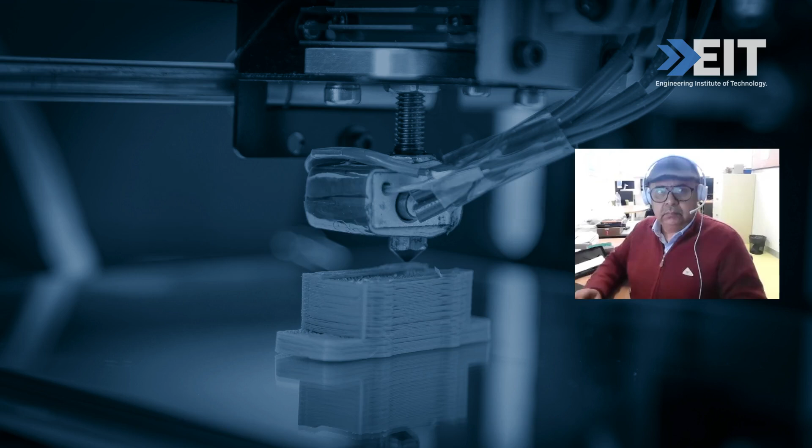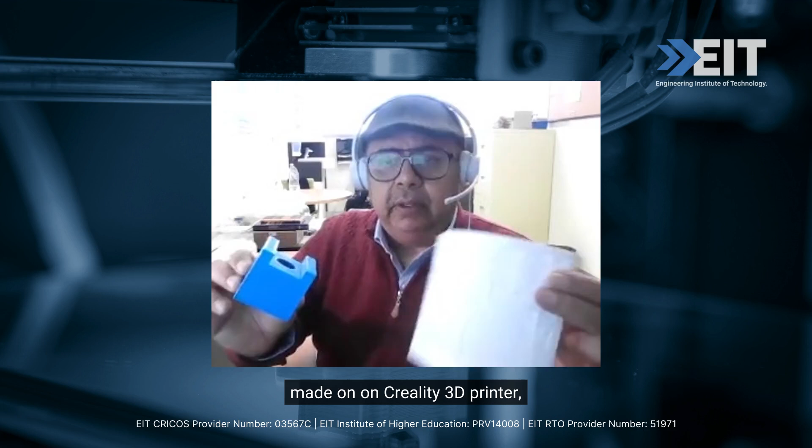Hello everyone. So today we'll see how to create a part on 3D printing. So we have a 3D printer available with us, Creality Make. We can create different products on that. These are some of the parts or products that we have made on the Creality 3D printer, which is available in our lab. Today in this video, I will demonstrate how to create a product.

Now this product which you see is a mobile stand, and in production it is manufactured by injection molding, but here we will be making it using our 3D printer. So how do we print this part? What I do, I start with the measurements.

After doing the measurements, we create a 3D model of this, and once the 3D model is ready, we prepare the model for the 3D printer. There are certain steps which I'll be explaining in the video, and then finally we print the part on the 3D printing machine. Once the part is ready, we remove the part, and then we do post processing. These are some of the steps that we'll be following in this video.

Now we have the CAD model available with us. We want to take this CAD model for 3D printing. There are a few intermediate steps. In fact, there are two steps. First, we have to create an STL file from this CAD model, and then we'll take that STL file to Slicer software for generating G codes.

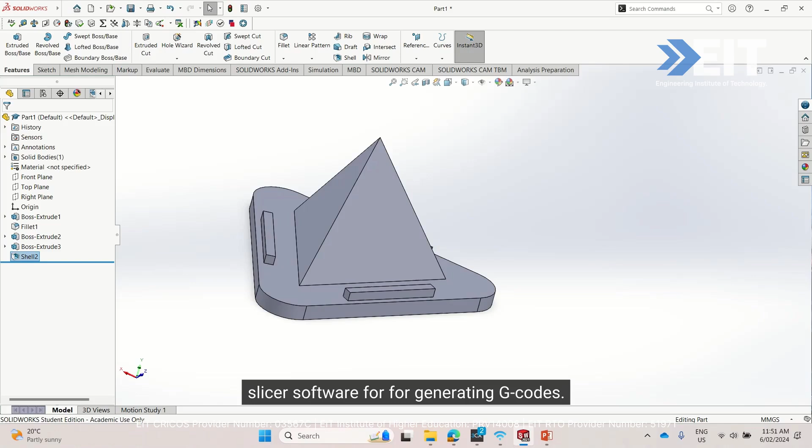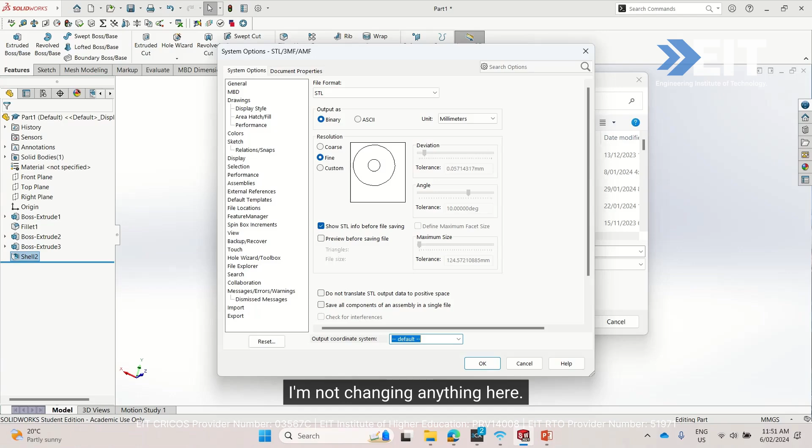For the first step, we have to go to File and Save As. In the save as options, we will be selecting STL, and when we go for the STL file format, there are some options. We can go to the options. For the time being, I'm not changing anything here. Simply say OK, and whatever option pops up, just accept that.

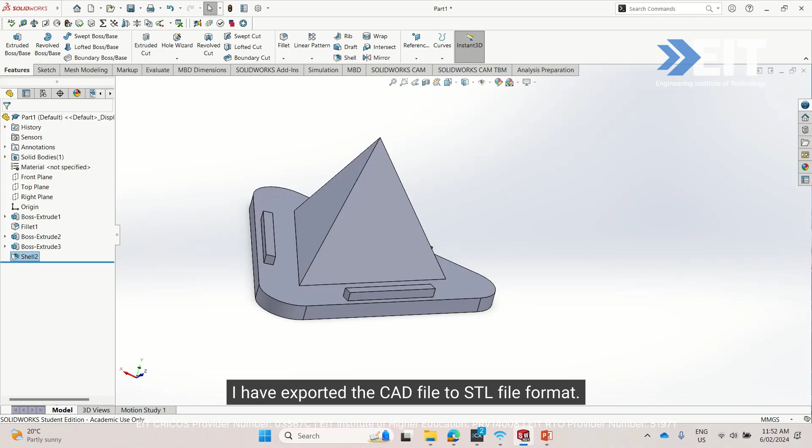Now I'm saving this file, part 1, on the desktop. Save. Accept whatever is being asked, yes, and OK. Now the STL file is created. I have exported the CAD file to STL file format.

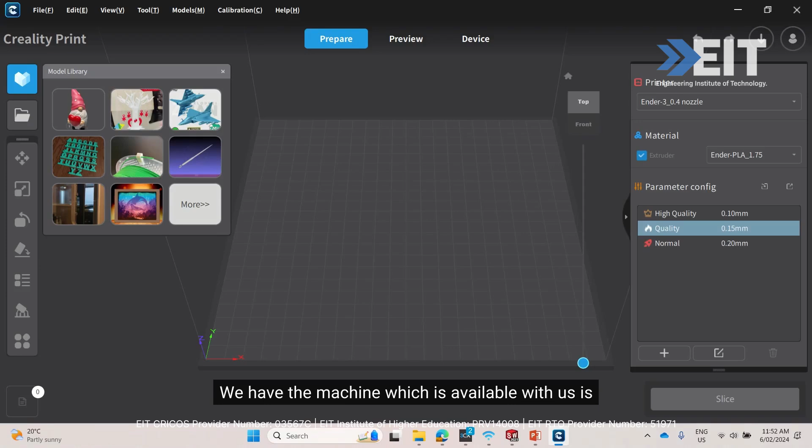Now I will open the STL file in the Slicer software, and the Slicer software that we have is Creality software, Creality Print. This comes with the FDM machine. The machine available with us is from Creality Make, and we are making use of Creality Print Slicer software. Now I will be opening the file which we want to print, part 1's STL file.

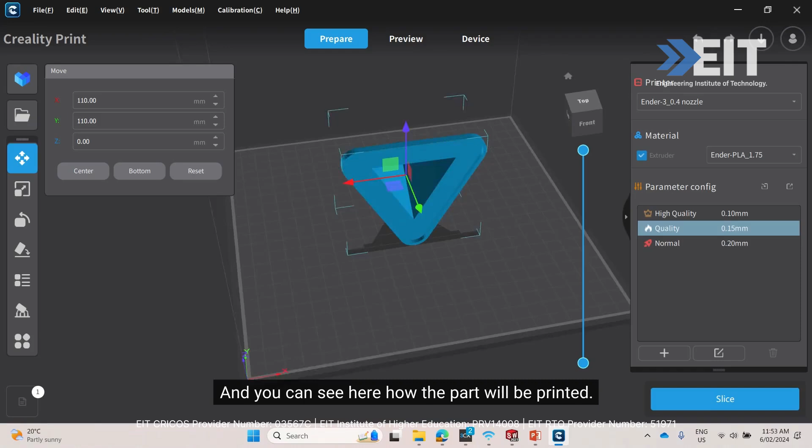Open, and you can see here how the part will be printed. The build area is shown, the bed is shown, and how the part is oriented on that bed is shown. This is not the right way of printing it. I want to rotate the part, and I want the maximum area of the part to be on the bed. In order to do that, I will be rotating the part, and for rotating the part I will use an option here on the left hand side, rotate.

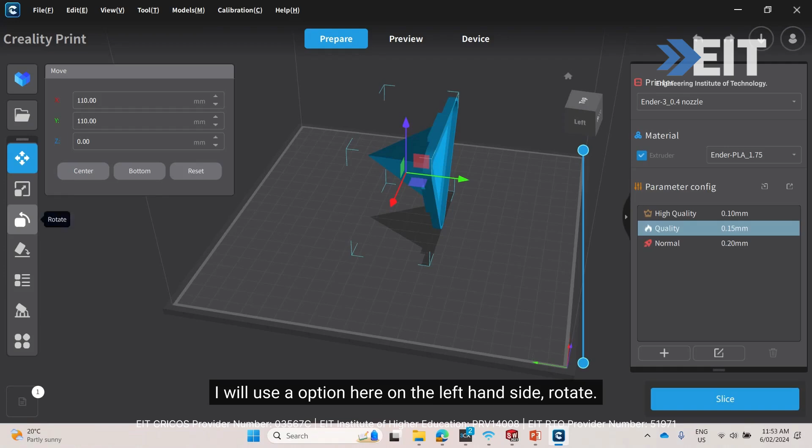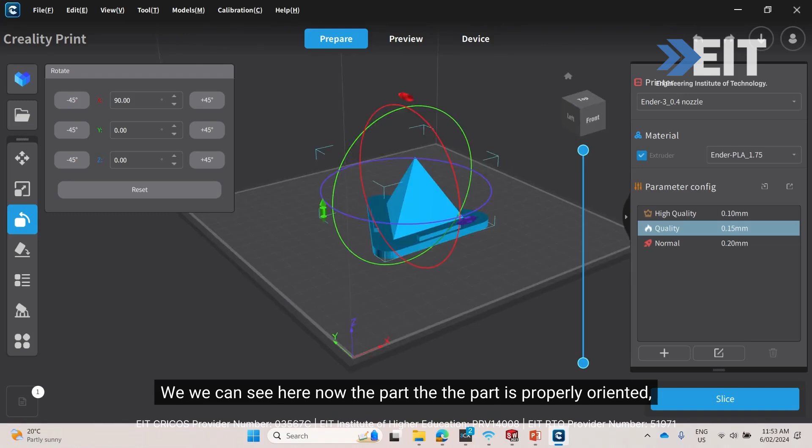Now I will rotate the part about the x-axis by 45 degrees initially, and then a second time by 45 degrees, so in total 90 degrees. We can see here now the part is properly oriented and it is ready to be printed.

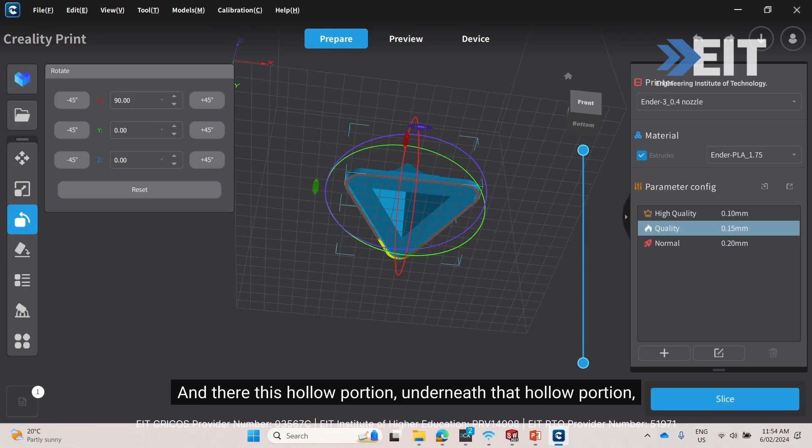But we have to do one more setting. If we see the part here, this is a hollow part, and underneath that hollow portion there should be some support material, then only it will be printed.

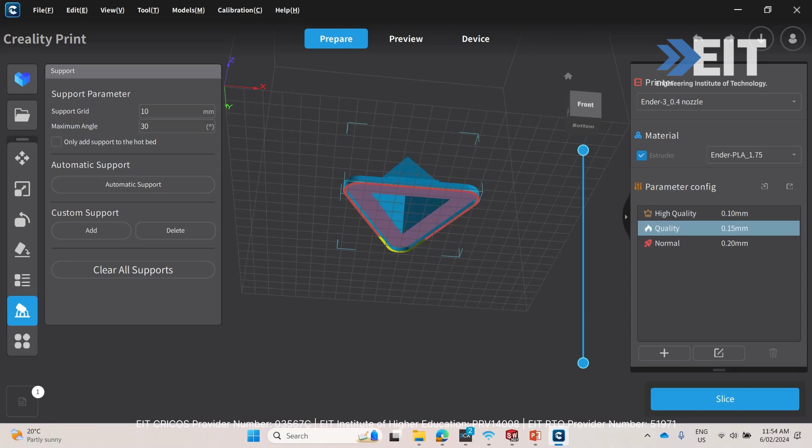So we have to provide some support material in this case, and in order to provide automatic support, go to this option, support, and select automatic support. The moment I do it, you will see what changes happen in the model. Wherever support is required, it will appear by using this option, automatic support. And now this is done.

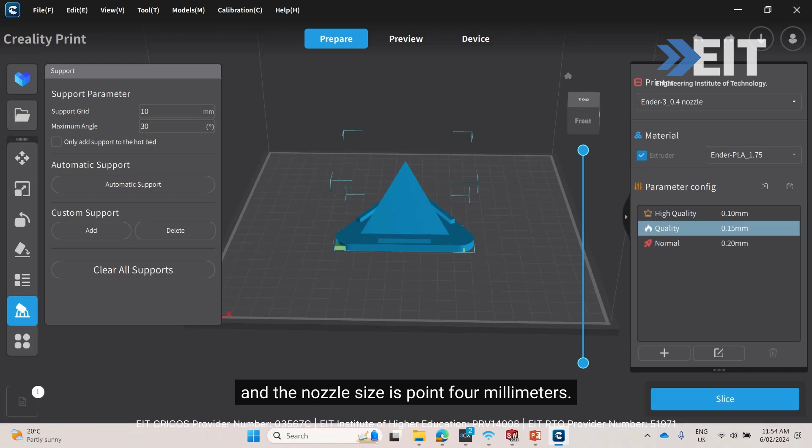Next step is I have to select the printer. The printer that we are using is Ender 3, and the nozzle size is 0.4 millimeters. Material that we are using is PLA, and for the parameter configurations, we can print it in 3 levels: high quality, normal quality, and medium quality.

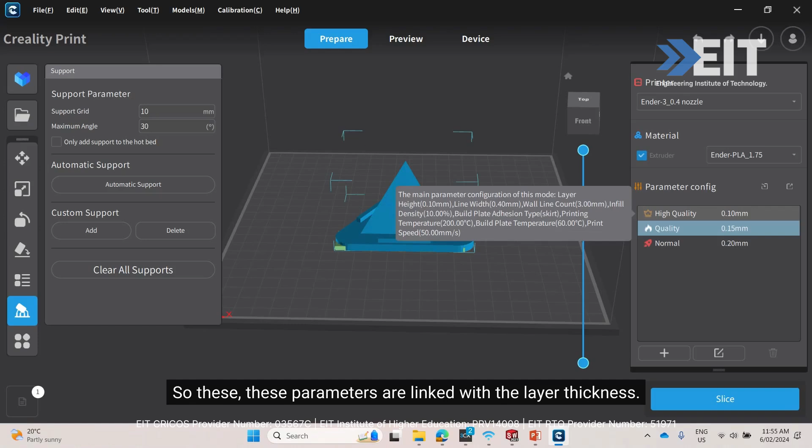So these parameters are linked with the layer thickness. So we go with the medium quality, that is 0.15 millimeter. Now we'll be performing the slicing operation. I'll click on slice, and we can see the slicing is over.

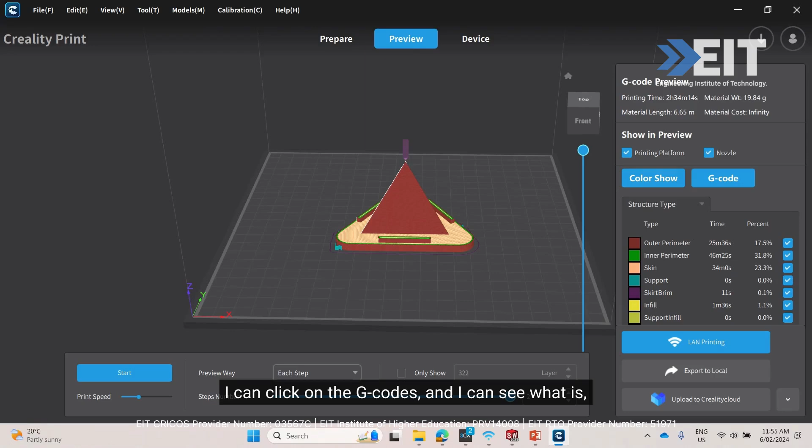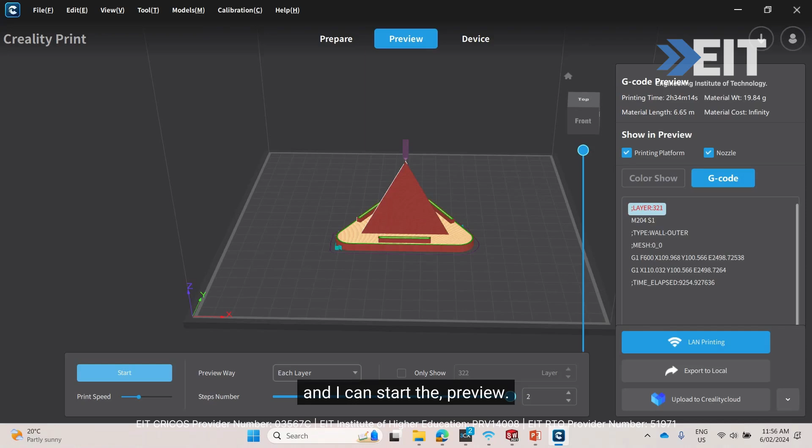I can click on the G codes and I can see what the G codes are here. I can also see a preview of how the part will be printed on the machine, and in order to do that I can check stepwise, or I can check layer wise. So in this case I'll be checking it layer wise, and I can start the preview. So you can see how the part will be printed.

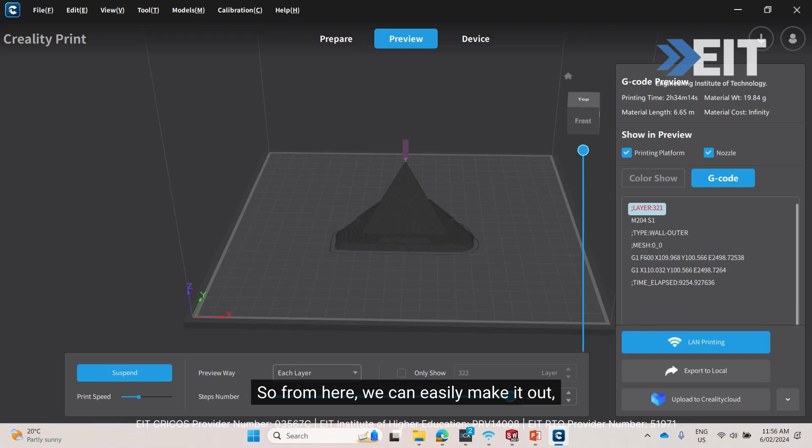All of it is indicated, and here on the right hand side you can see the G codes are running. So with each block of G code, what is happening on the machine is indicated here in this animation. So from here we can easily make out how the part will be printed, and if there is any issue with the printing, we can resolve it here before we take this file for 3D printing.

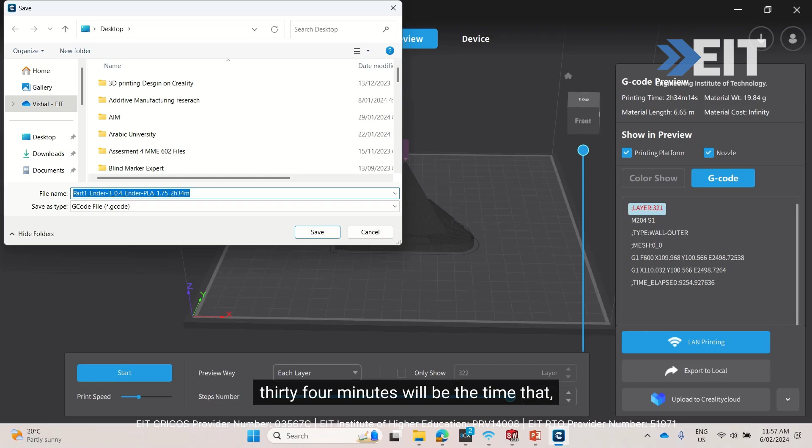Now everything appears to be perfectly fine, so we export the file to a local drive. We take the file from here, export it and save it on the desktop again, and the file format is G code format. So here you can see it is indicating 2 hours 34 minutes will be the time it will take for printing on the 3D printing machine. So save it.

The file is saved. The file which is saved, we can locate from here and we'll take it for printing on the machine. So this is the file. Now from here we copy this file on a pen drive and take it to the 3D printer for printing, and that's it. A few settings are required on the 3D printer, and those settings I will be explaining to you shortly.

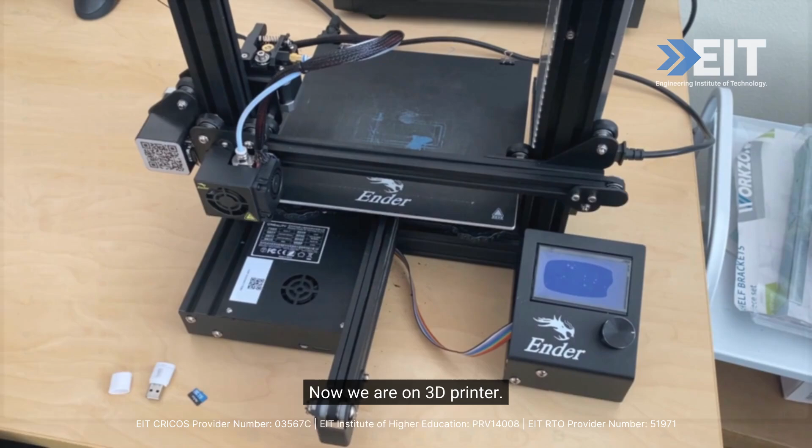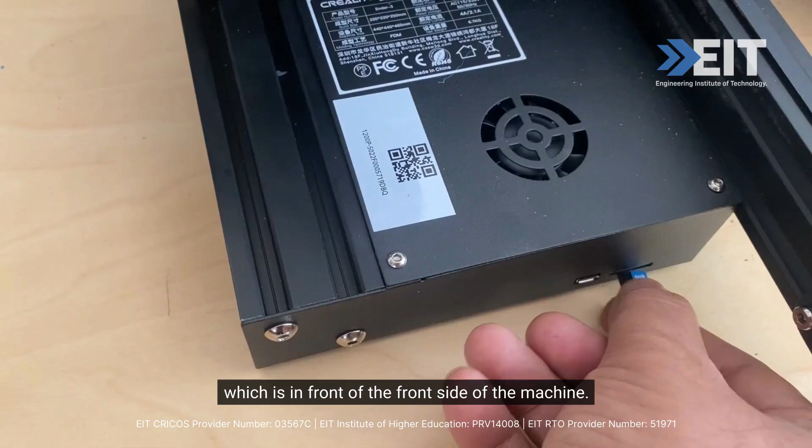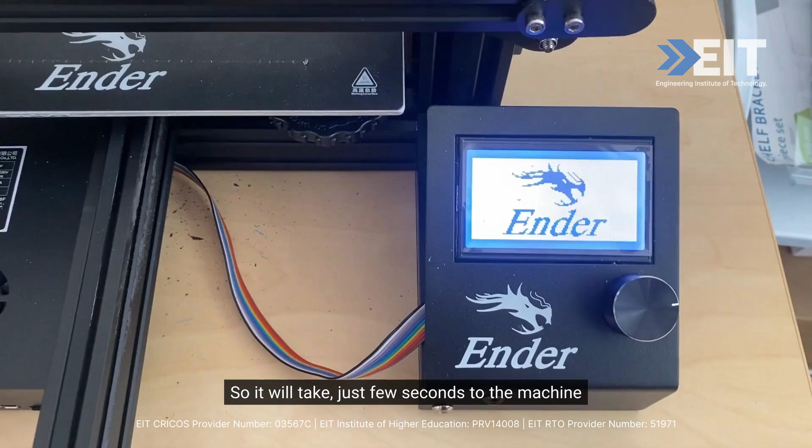Okay, now we are on the 3D printer. We have copied the program and brought it here on this SD card. We'll insert the SD card in the slot here, which is on the front side of the machine. The SD card is inserted, and now I will be switching on the machine. So the machine is switched on. It will take just a few seconds for the machine to be ready.

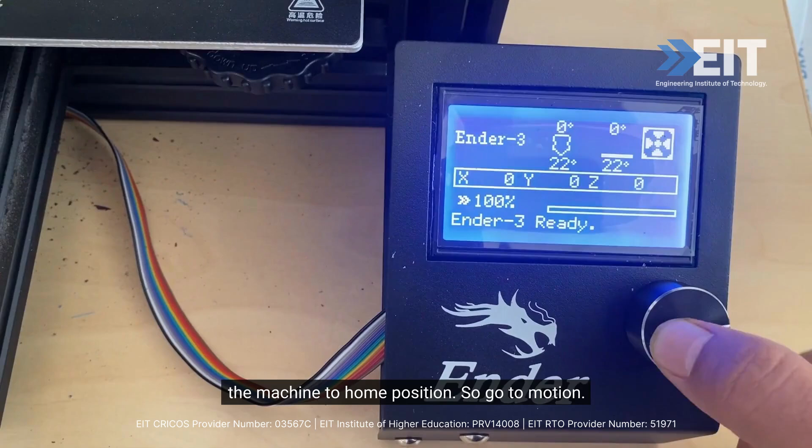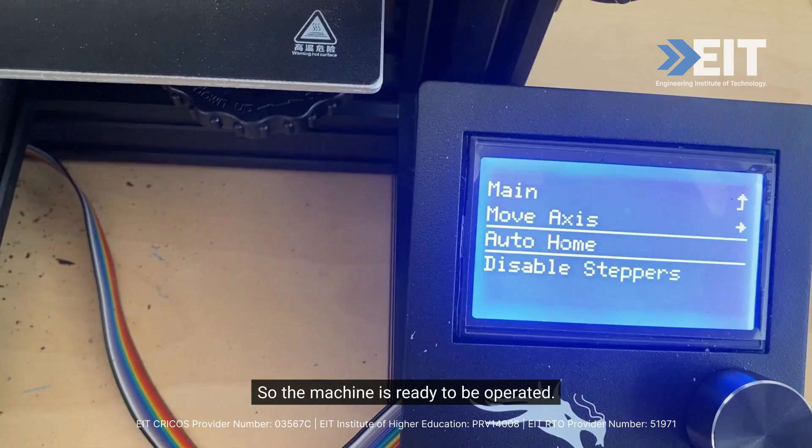Now the machine is ready, and the first operation we normally do is bring the machine to home position. So go to motion, and from here select auto home. The moment I do, all the axes and the table will come to home position. Now you see, the machine is ready to be operated. Now we will be selecting the program which we want to run.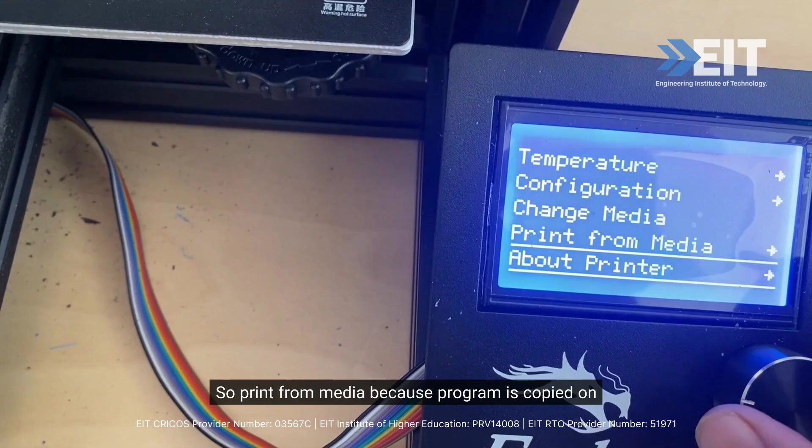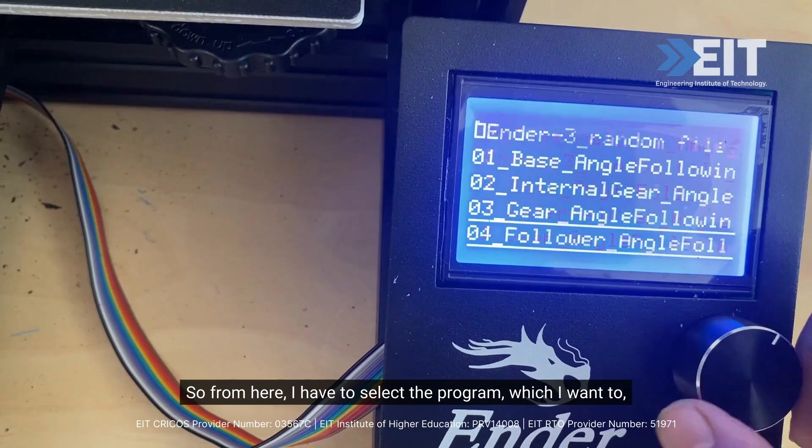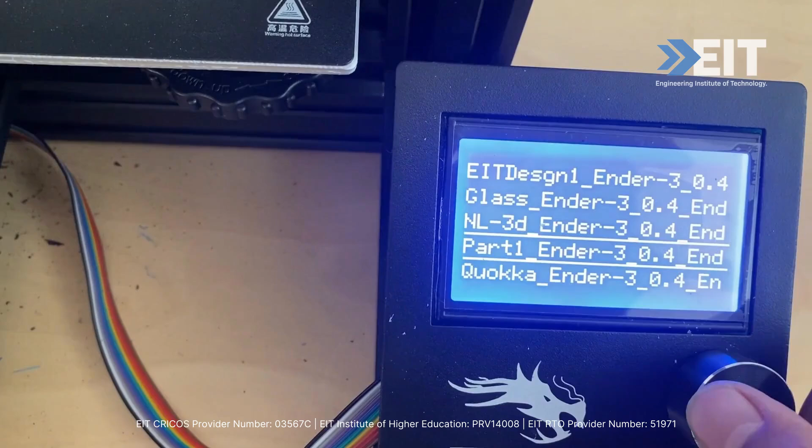So print from media, because the program is copied on the SD card and the SD card is inserted in the machine. So from here I have to select the program which I want to run, and it is part 1. Enter part 1. Okay, so print. Once I do this, now the bed is heating. It is showing here, 60 degrees; the bed will heat up to 60 degrees.

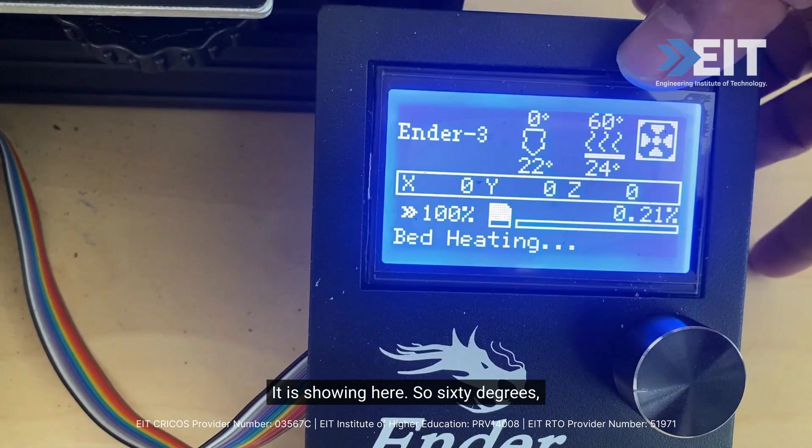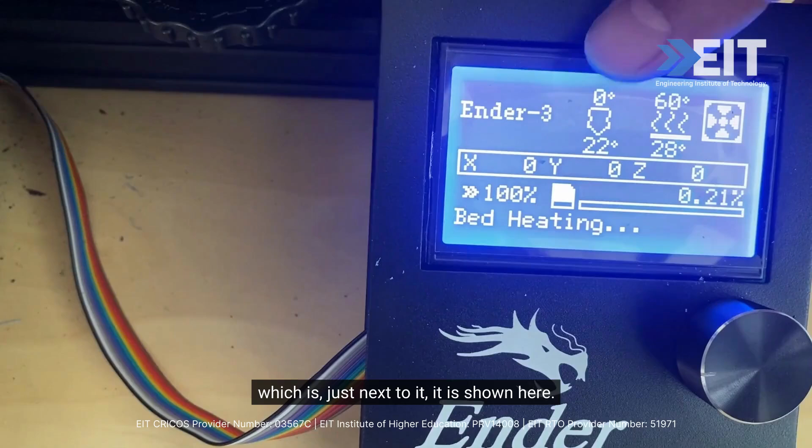At the moment it is 24, and once the bed is heated up to 60 degrees, then the nozzle, which is shown just next to it, at the moment is 0 degrees. It will start heating and it will go up to 200 degrees, and then the printing will start.

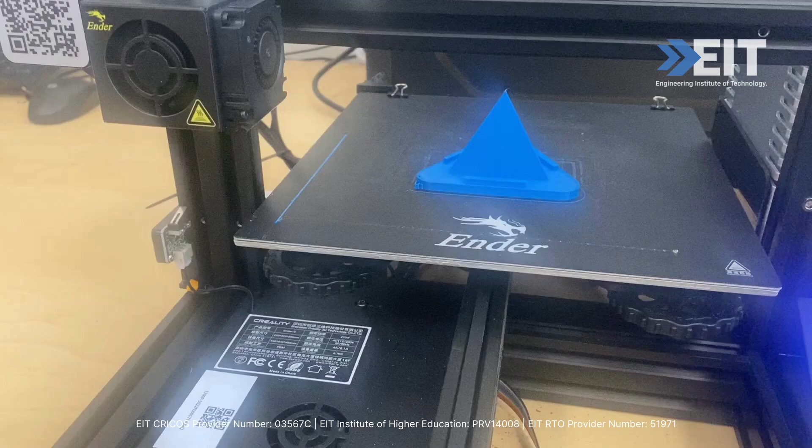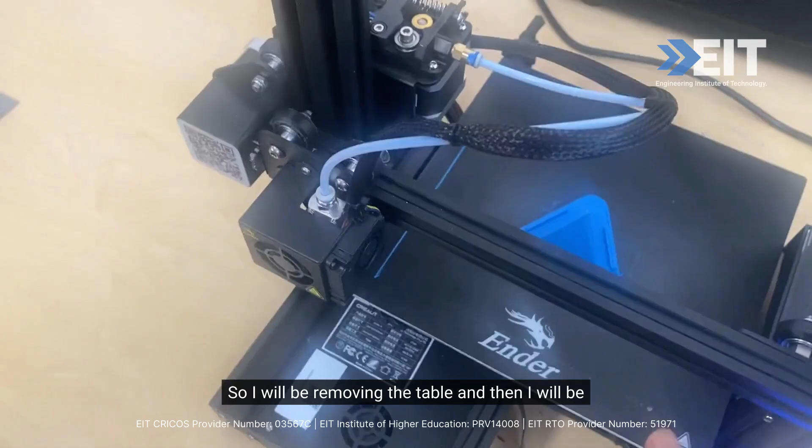So we can see the print is now ready, and it took us 2 hours 29 minutes and 32 seconds to print this part. Now our post-processing step starts, and for that I will be removing the part from the machine. So I will be removing the table, and then I will be using this scraping tool to remove the part from the bed.

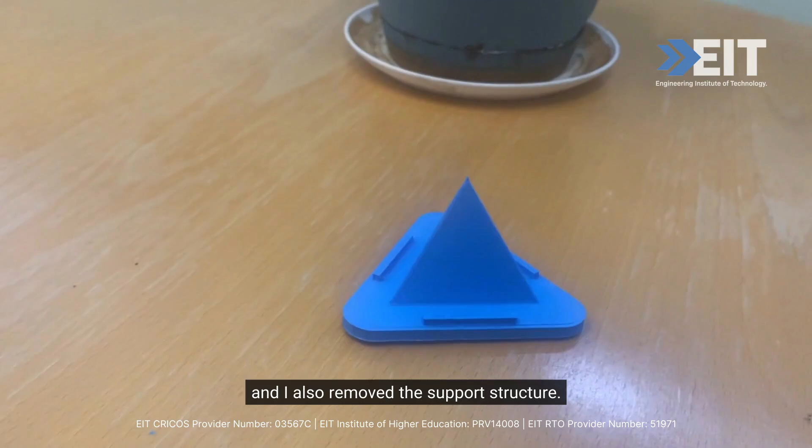The post-processing step took about 6 minutes. In that I removed the part from the machine, and I also removed the support structure. Now the part is ready to be used. So you can see it is designed properly, and now we can use it as per our requirement.